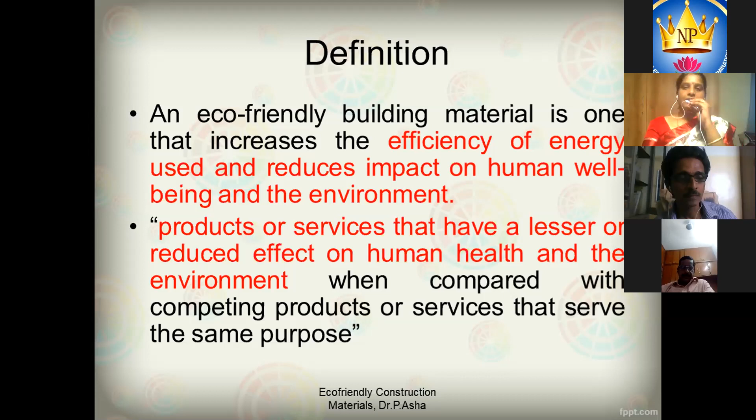Hello? Am I audible to everyone? Hello? Am I audible to everyone? Yeah, ma'am, audible. Just continue, ma'am. Okay. If I'm not audible, please message me so that I will stop and I will continue.

So as we all know, bamboo is a very commonly available material, not in the urban areas, but in the rural areas, and it is a type of grass. Bamboo is actually a member of the grass family, and it is one of the fastest growing plants on the planet, supposed to grow up to 3 feet per day. You may ask why not the other trees. The reason is, for construction purposes, bamboo can be harvested every 3 years. In contrast, trees take about 25 to 50 years to grow. That is the reason why bamboo is said to be an eco-friendly material.

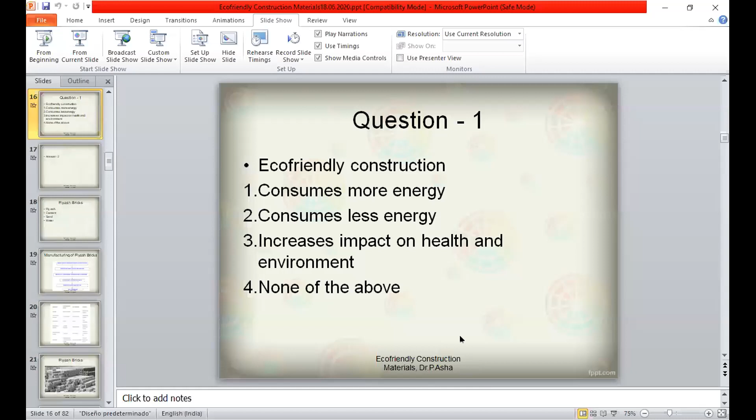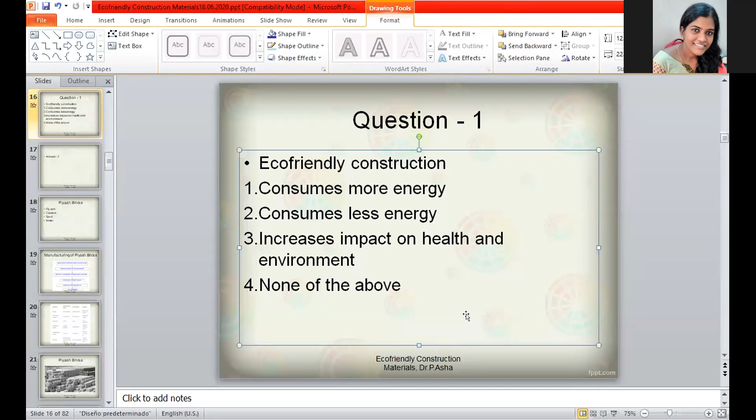Ma'am, click that share screen button instead of that. Yeah, I did that. It's visible, ma'am. Now it's visible. Thank you, ma'am. Visible? Yeah. It's not visible. You can WhatsApp me on my number also so that I'll become alert. I don't know whether it is visible to you or not. Okay, ma'am. Now it's visible. Yeah, ma'am, now it's visible. Okay. Thank you, ma'am. Students are online.

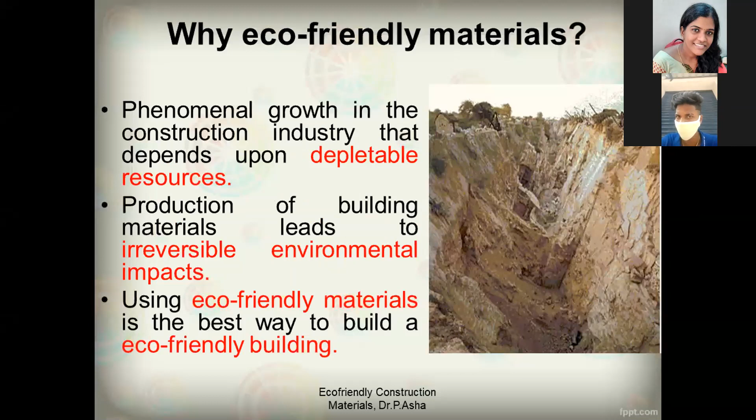Are they answering the question? I'll pose the question again. So eco-friendly construction, it means, I'm giving 4 options: whether it is consuming less energy, or it is using more energy, or increasing the impact on health and environment, or none of the above.

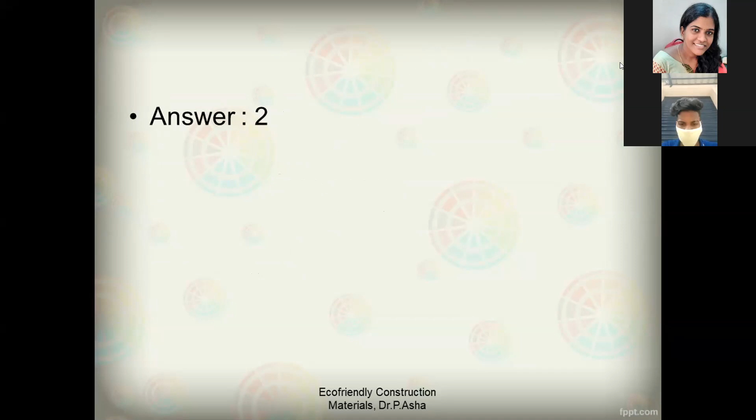Subhadra ma'am, are the students answering the quiz? Eco-friendly construction materials. Eco-friendly construction: whether it is consuming more energy, less energy, or increasing impact on health and environment, or none of the above. So what does eco-friendly construction mean? I just want the participants to answer this. Yes. Bharani Rajavel has answered the one which consumes less energy.

So the screen is not visible to you. I'm not aware of it. Sorry. Now it is being corrected, I think.

Yeah, it's consuming less energy. Yes. So I thank the participants who are responding in the chat window. I'll continue with this now. So eco-friendly construction is the one which is consuming less energy. Now I'll proceed to other eco-friendly construction materials.

The next one is the fly ash bricks. As we all know, fly ash has been used for a long time in the construction industry, which is a byproduct obtained from the thermal power station. Earlier it was used only in concrete for construction, but nowadays it is being used for bricks also. So the fly ash bricks are manufactured

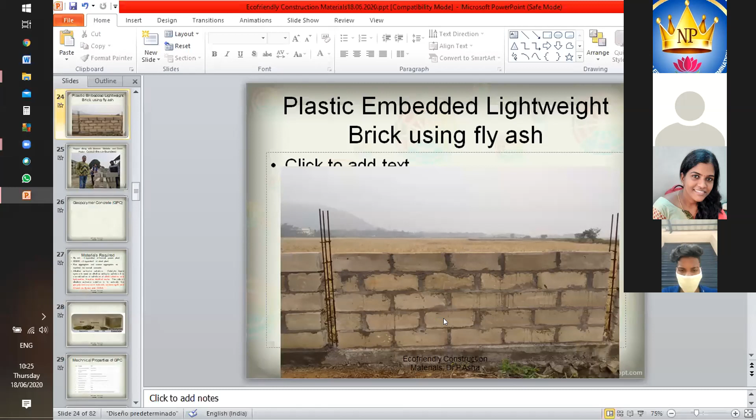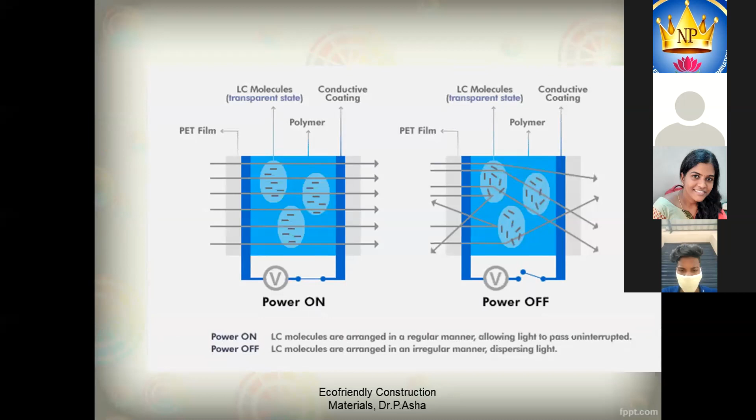Sorry, ma'am. Excuse me, ma'am. Your screen is not visible again, ma'am. Now it's visible, ma'am. Thank you. I don't know why it's going again. Visible? Yeah, ma'am, it's visible. So the fly ash bricks again. It is being recorded, no? The program is being recorded? Yeah, ma'am, it's being recorded. Okay, thank you.

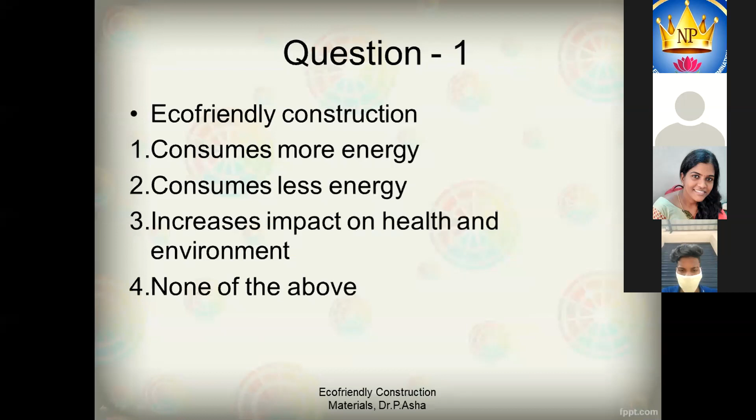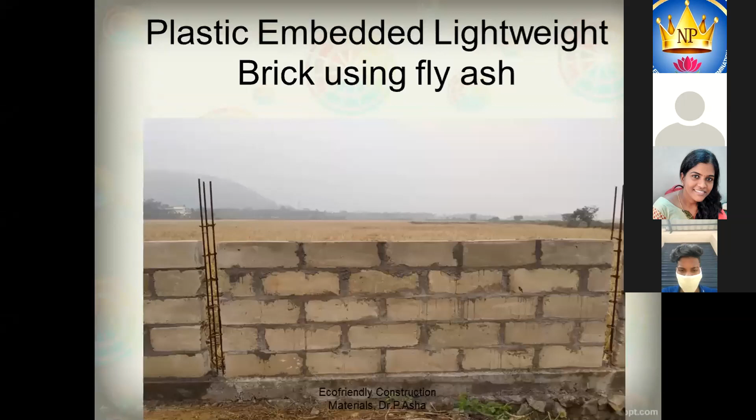So fly ash itself is a waste material. In addition to these fly ash bricks, if you add plastic in it, which is another waste material, it becomes double eco-friendly, and it is also lighter than the conventional fly ash bricks and also the conventional clay bricks. This is the wall being constructed with the plastic embedded lightweight bricks. If you are using plastic, one disadvantage is that the strength may get reduced, and we have to take care of it.

This is the photograph of the students who have the startup of fly ash bricks with plastic waste. So like this, I want the current students to have some interest in these materials and find something innovative like these people. Just to motivate you, I showed that.

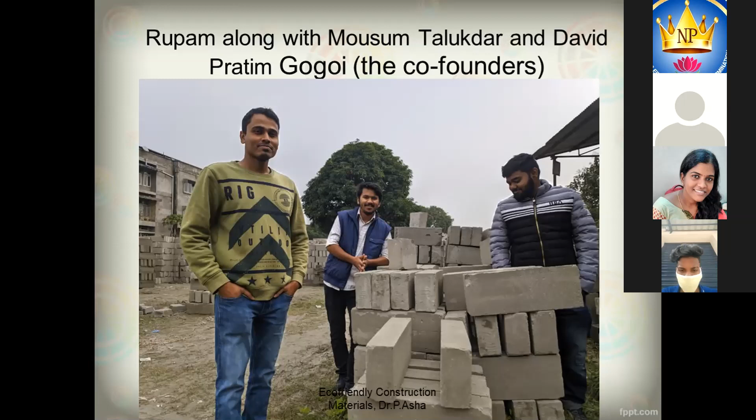Geopolymer concrete is another new material which is being introduced in the market. It has only fly ash and GGBS as the cementitious material. You do not have any OPC. If you are completely omitting OPC, it means that you are saving a lot of carbon dioxide emission into the atmosphere and also less energy consumption. Along with fly ash and GGBS, fine aggregates and coarse aggregates are used. Another important ingredient of geopolymer concrete is the alkaline activator solution.

So why do we require this alkaline activator solution? It acts like a catalyst which increases the pozzolanic activity of the fly ash and GGBS. If we simply add fly ash and GGBS, the chemical reaction producing the binding capacity is very low. In order to activate that, we have the alkaline activator solution, and they use alkali silicates and hydroxides, that is, sodium hydroxide and sodium silicate. Much research is going on in this area.

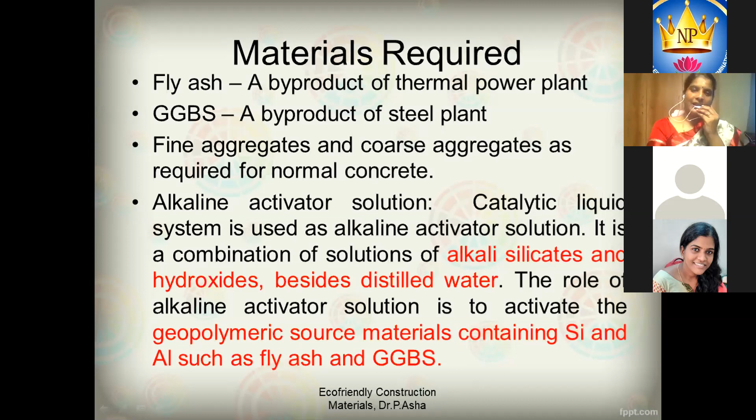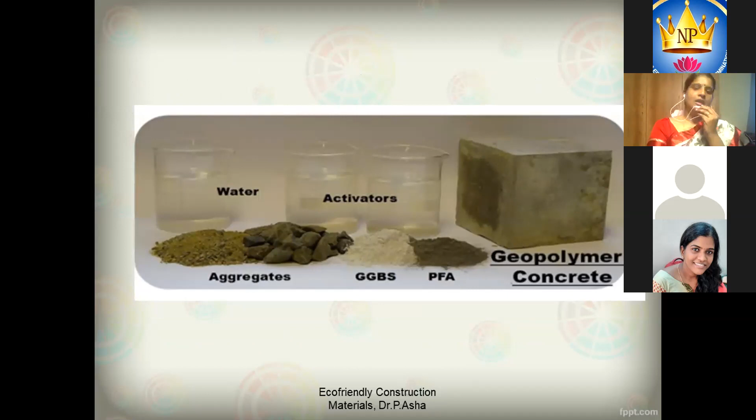I don't want to get into the detail of that, but geopolymer is the one which completely avoids the use of cement. It comes under the category of eco-friendly materials. The main ingredients used so far are fly ash and GGBS. We can try other new materials. This photograph shows the ingredients of geopolymer concrete, that is aggregates, water, activators, GGBS, PFA, that is pulverized fly ash. These are the main ingredients in geopolymer concrete.

What are the mechanical properties? Any material which you claim as eco-friendly, or which you are researching, should definitely have better properties than conventional concrete. We cannot simply add plastic, we cannot simply avoid the OPC, but we have to prove that this material is superior to the conventional existing materials.

The compressive strength of GPC, that is geopolymer concrete, goes up to 35 MPa in 24 hours. The 28-day compressive strength goes up to 70 MPa. And the rate of gain also seems to be faster than normal concrete. And the modulus of elasticity: we test the stress-strain behavior of the concrete, find the slope, and get the E value. The E value plays a major role in resisting deflections, but it is comparatively lower than normal concrete. Porosity, another durability property, is found to be low in GPC.

The chloride penetration is also very, very low. The chloride penetration, if it is low, it is advantageous. It is not allowing the chlorides inside it. The next one is the drying shrinkage, low, heat of hydration low, fire resistance high, acid resistance high, and it behaves similar to the cement concrete beams. So these are the properties of the geopolymer concrete.

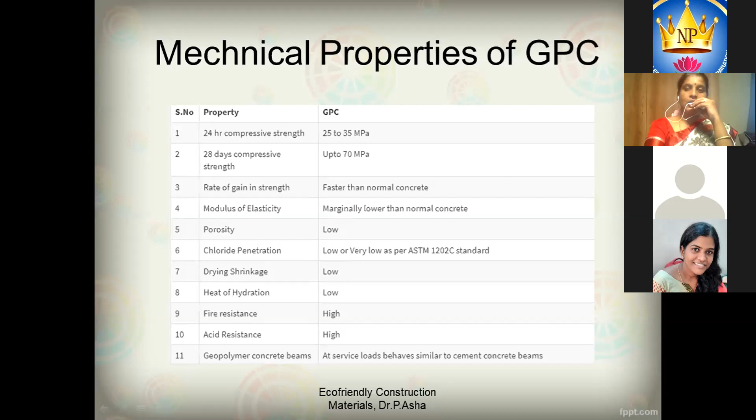So the next one, I want to tell about some alternate materials for the aggregates. Since we are using the stones, that is the blue metals or the coarse aggregates, there are different names for the coarse aggregates, that is basically taken from the granite mountains. So nowadays, if you see, everywhere it is being exploited, and the mountain and the granite quantity also is getting used vastly. So everywhere we have a shortage of natural resources. So we should explore what are the alternate aggregates.

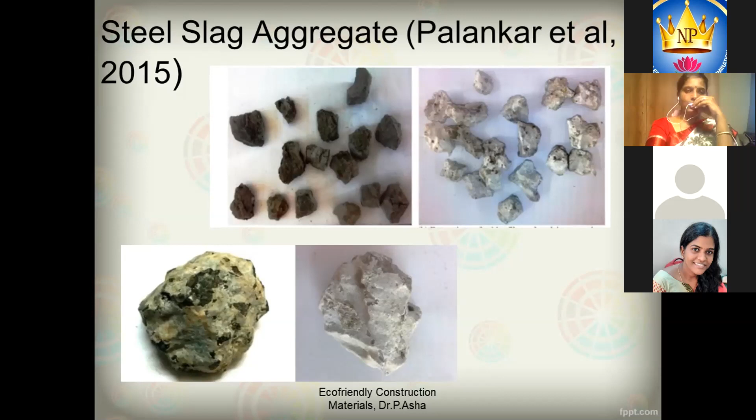So Palankar, these are all the research works done already. I have given the references also on the site for you to refer. In 2015, they conducted research on steel slag aggregates. So steel slag is being used as the coarse aggregates. If you are doing this, you are conserving the natural aggregates. That is the main aim for eco-friendliness.

So another important advantage is, the steel slag, when it is being used in the dump yards, has high cost involved in it, and also the negative impact is more. This steel slag is produced from either the oxygen furnace or electric arc furnace. Either method it is produced, and it is generally dumped. But this is not an effective way of disposal of this waste material. So instead, if we use it as coarse aggregate, we are not only preventing the environmental impact it is creating on the land, but also we are having some benefits.

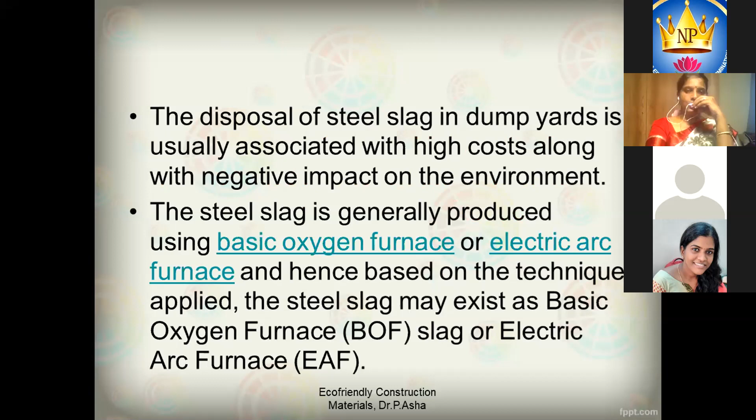So what is the steel slag which is being used? So that is a comparison. Any material which is being put into the concrete, we have to check whether it has superior behavior than the conventional thing. So if you are using the steel slag instead of the coarse aggregate, you have to check it against coarse aggregate. That is what is done here. So the specific gravity of the conventional aggregate is 2.69, whereas this is 3.35. And the bulk density is 1700, whereas the conventional one is 1500.

The crushing value, for aggregate you have to test the crushing value, is comparatively lesser than the conventional aggregate. And the Los Angeles abrasion value, if you are using it in pavements or in an industry field, we have to check for this product. All these values are low. So accordingly, we have to decide where we have to use this aggregate. Any waste material, we cannot 100% say that it is super beneficial, but of course it can be used in appropriate situations so that we can reduce the waste dumped onto the land.

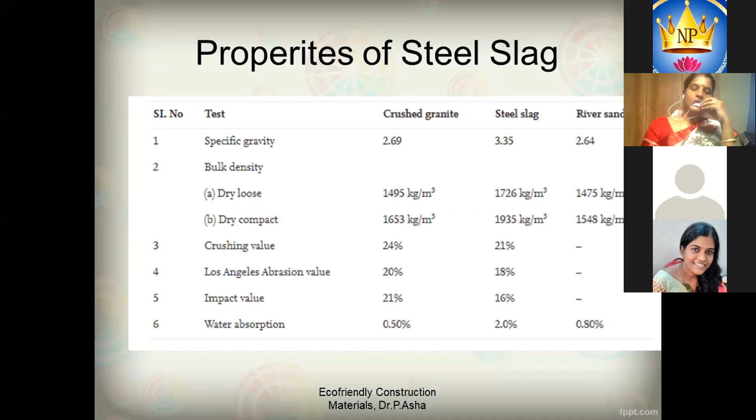So if you take the compressive strength at 28 days, they have tested the steel slag with the geopolymer. It is found that 56.1 Newton per mm square is obtained. The conventional is 55.9. So it is almost on par with the conventional. If you take the slump value also, it is 55, whereas the conventional concrete also has 35. So like this, we have to compare various properties which we obtain with these alternate materials.

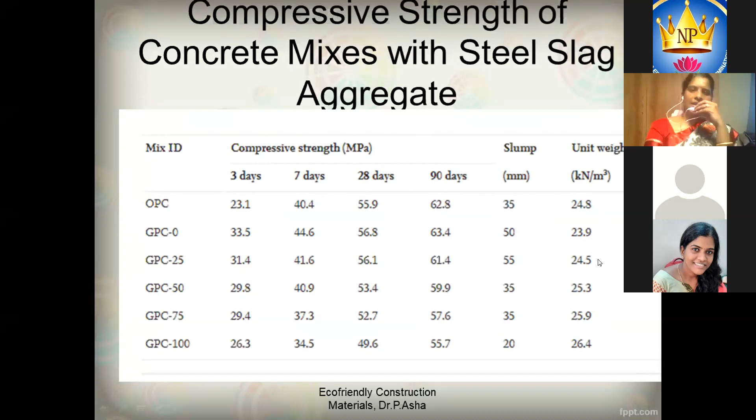If you take the unit weight, it is nothing but the density of concrete. So 24.8 is the conventional concrete unit weight, whereas if you take geopolymer concrete with steel slag, the unit weight keeps on increasing. So what would be the reason? The density of the aggregate is higher. That is mainly causing the increase in the unit weight. So like this, we have to analyze the effect. Similarly, if you take the flexural strength, split tensile strength, all these parameters, the steel slag aggregates have properties of the conventional concrete with 25% replacement.

Tensile strength increases at the 25 and 50, whereas flexural strength increases only at 25. Thereafter, it is getting decreased. So you should find out what is the optimum percentage of use of steel slag aggregates, and then you have to proceed. Modulus of elasticity, if you take, it is getting decreased. So it is not as stiff as the concrete. So like this, we have to classify.

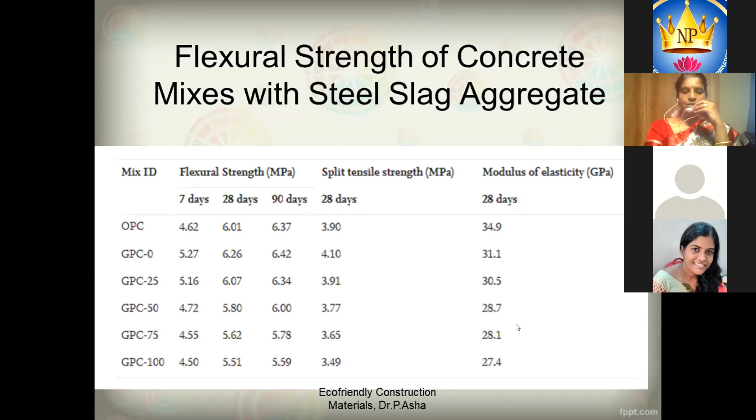So now it's time for the second question. I want participants to answer this in the chat window. What does GPC stand for? Ground plain concrete, geo plain concrete, geopolymer concrete, or none of the above? Kindly share your answers. Yes, so I can see some students who are typing the answers. Yes, option 3, geopolymer concrete.

So for Ramya, I'm not audible. I think I'm audible to most of them. If I'm not audible, the coordinator will inform me.

Yes, GPC stands for geopolymer concrete. So hereafter, if you see GPC anywhere, you will remember me. So at least I have created some awareness and enlightened you in some areas of eco-friendly concrete. So now continuing to the presentation, the answer is 3.

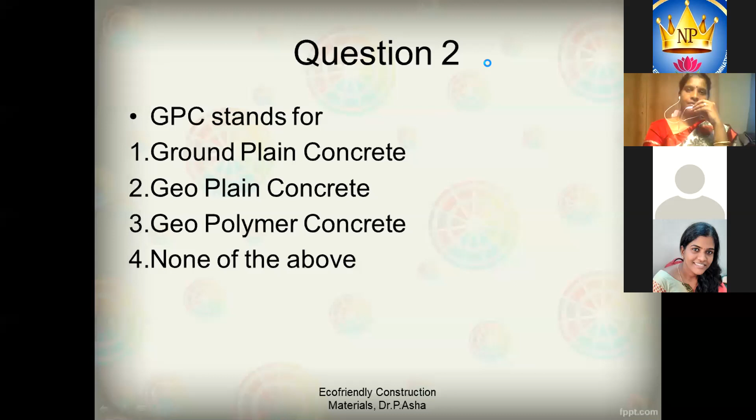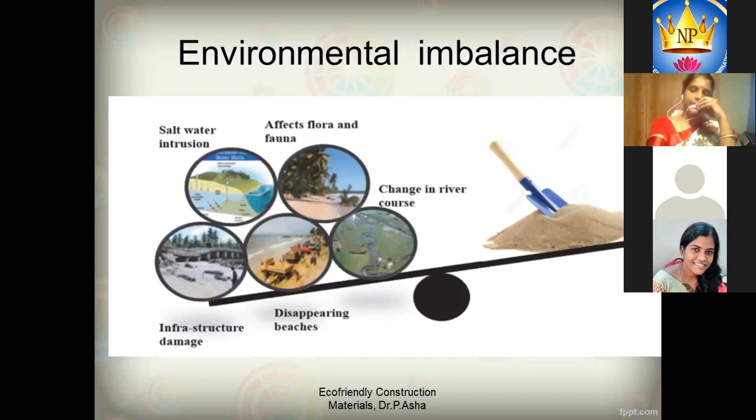And also disappearing beaches. Even the beach sand is now being excavated because we want sand, and the river sand is getting completely decreased. The quantity available is completely decreased. So what should we do as civil engineers? Why can't we think of alternate materials? So that is the next one, the M-sand. All of you, I think, would have known this term M-sand.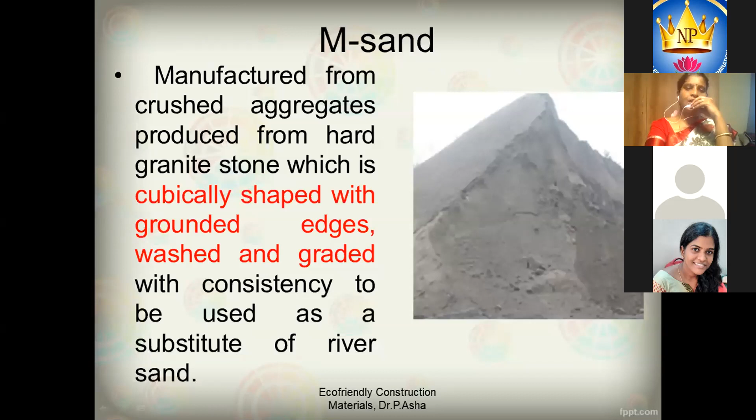So M-sand is produced from hard granite stone, which is cubically shaped with ground edges, washed and graded with consistency to be used as a substitute for river sand. So this is the manufacturing of sand. First we do drilling, then blasting of the rocks, and extraction. It is subjected to primary crushing, screening, and then secondary crushing, and finally it is washed, the sludge is removed, it is converted into M-sand and transported.

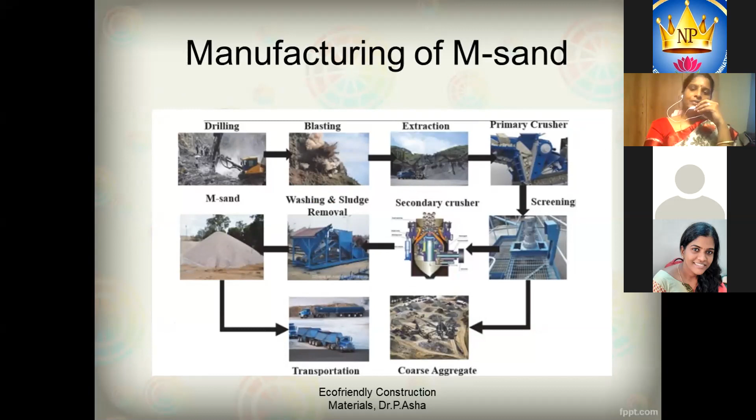So M-sand is not just the waste material obtained from the crushing of granite. It is subjected to different processes, as you can see in the flow chart, so it is tuned to act as a fine aggregate in the concrete. M-sand has a higher fineness modulus, so it has very comparable workability in concrete compared to natural river sand. M-sand is also free from silt and clay particles, offers better abrasion resistance, and has higher unit weight and lower permeability. So it is less disruptive to the environment because we are already using the waste material available.

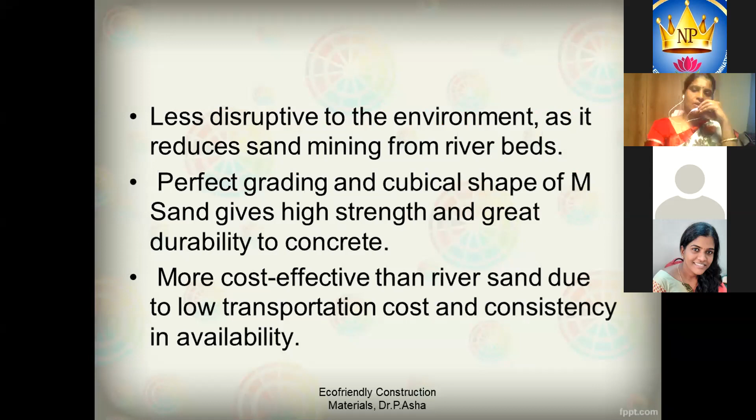So it is less harm to the environment, and we are not using extra energy in producing it. Perfect grading and cubical shape of the M-sand will give higher strength. Any sand particle should have a particular grading, meaning certain size ranges, and only then can it be used in concrete. And also the shape: it should have a cubical shape for better workability and durability. It is more cost effective than river sand due to low transportation cost and availability, because it's a waste material.

So when we come to the features of eco-friendly buildings, if you say a building is an eco-friendly building, what are the features it should have? It should have a solar panel. All of you would be aware of the solar panel.

It converts the heat energy from the sun into electrical energy, for heating water or providing electricity in the house, like that. Next one is if you use Energy Star appliances. Nowadays we go for 5-star rating, 3-star rating. That is nothing but the Energy Star appliances. It uses less energy, and it decreases the current bill also. So those types of apparatus or instruments you have to use.

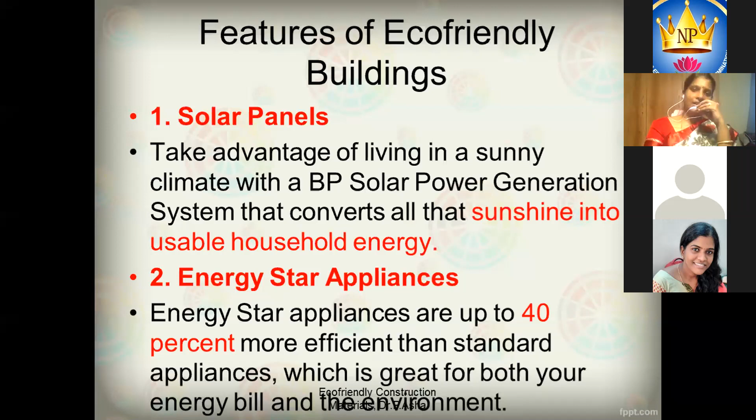And water conserving methods. So what are the water conserving methods? Either you have rainwater harvesting, or you have to use low flow shower heads, faucets and toilets. In other foreign countries nowadays, you can see in Facebook and WhatsApp, many videos are coming. Just an example from my observation, they are using the wash basin water for flushing in the toilet. This is a very simple example. So we have to think in that way, how the grey water can be used for recycling in our own house.

So the wastewater can be used for watering your garden, washing the car, or even toilet, saving gallons of water. And you can use water using instruments which use less amount of water. Like that, you can think and use the apparatus or instruments or devices.

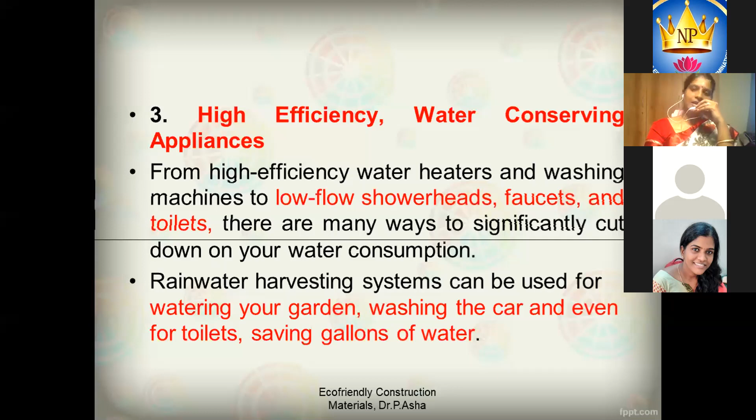The next one is the low emittance windows. I told you already about thermochromic glass. Like that, you can use energy efficient air conditioning. When you are using energy efficiency ratio, you have to be very keen on that. That is, if you divide the output by its input, it should be high. You should have less input current, but the output should be high. You should use such devices in this construction or after construction, so that you can cool your home effectively while saving money on your electric bill.

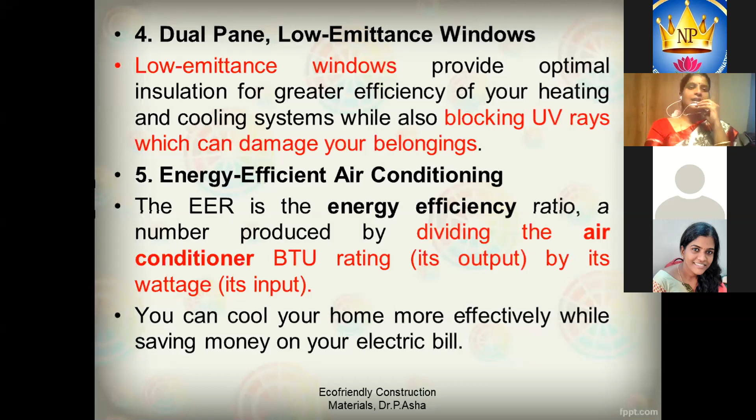And another one, smart thermostats. Nowadays, it is available in the conventional AC itself. So it goes up to a certain temperature and automatically cuts off. So it turns off the unnecessary heat while you are at work and back on when you are at home. Similarly, smart lighting. When you are not available, it should get switched off automatically. Like this, latest technologies, smart technologies you have to use.

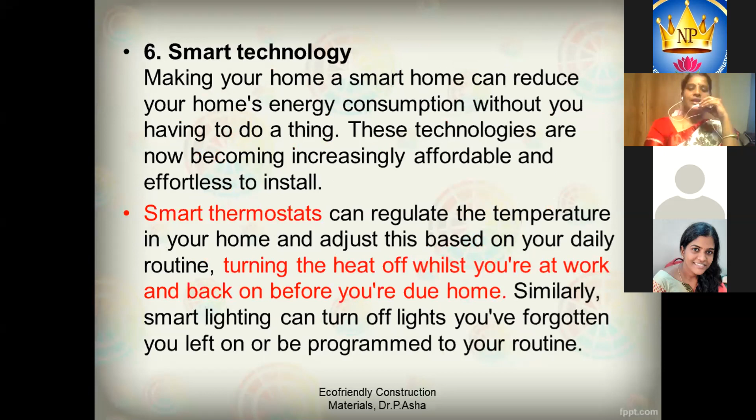And also the insulation. Insulation is a main thing. It is being done in the Western countries. So far, we are not using any insulated walls. But it is better to go for insulated walls in order to avoid the transmission of unwanted heat inside the buildings. Some of the materials we can use for insulation are cotton, cork, and recycled plastics, etc. Insulation is nothing but it acts as a barrier. And there is also now a wide variety of natural eco-friendly alternatives to traditional insulation materials, which often contain high amounts of problematic chemicals and additives.

When using insulation also, you should be very careful that we are not using any materials which are harmful to human health. Nowadays, we can see advertisements on TV like paints which are shielding your house. It acts like a lamination. So all these materials are used as an insulation only. It's a paint example. Like that, we can explore in the walls also, which act as an insulating material. So next one,

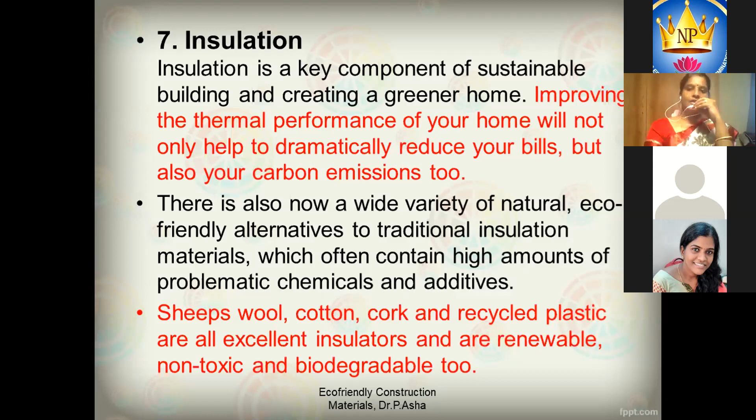in a new building, you should take care that you are using the maximum lighting and ventilation which is available outside your home, so that you don't need to switch on the lights and fans during the daytime itself, but it is very common that our houses are jam-packed in such a way that we cannot. So we as civil engineers have to plan effectively, allowing the natural light and ventilation like we did in the olden days.

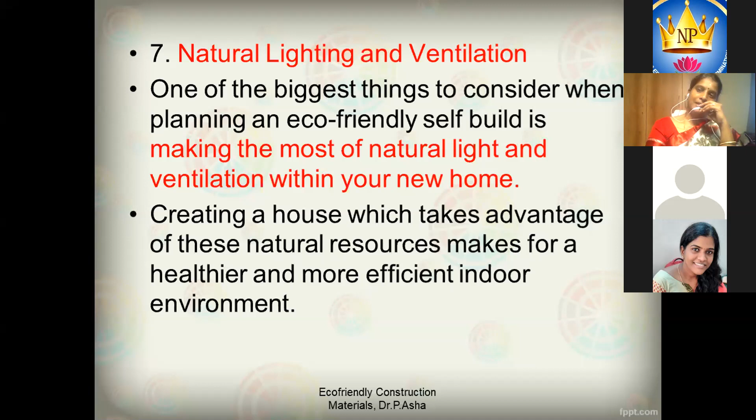Actually speaking, the olden methods are very golden methods, because they made use of the light and air available in the outside atmosphere to make the inside of the home very bright. They did not use any tube lights. They did not use any fan during the daytime. But now you see in every house, even during the daytime, the AC is running. So we are in that situation now. So we have to plan our houses in such a way that we get the maximum lighting and ventilation. And another one is the reclaimed wood.

So the wood reclaimed from the old buildings and furniture is more mature. It is more often very useful. It is stronger, durable, and less prone to warping. So we can think about this. Construction doesn't mean only cement, sand, and aggregates, but also the wood, also glass, everything comes under construction material. So we should also think about this.

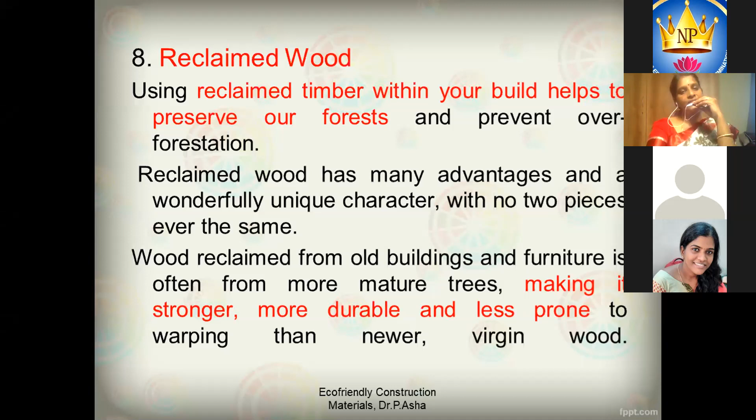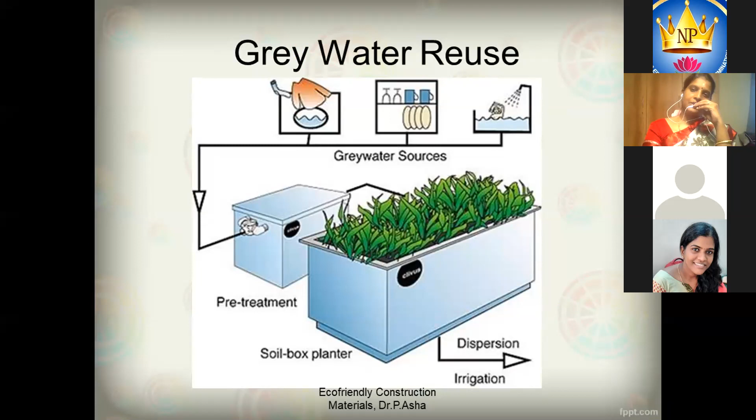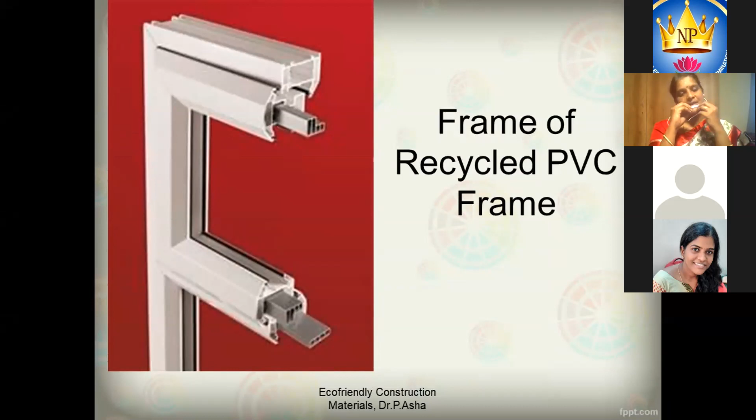So now I come to the third question. So mention any two features of eco-friendly buildings which we discussed now. Any two features.

So I come to the next one, that is the eco-friendly cement. So eco-friendly cement, if you take the first one, we can say Portland Pozzolana cement. Portland Pozzolana cement is already known to you all. It is nothing but replacing the conventional cement with fly ash or GGBS like that. So those types of cements are available now in the markets. So it is an eco-friendly material.

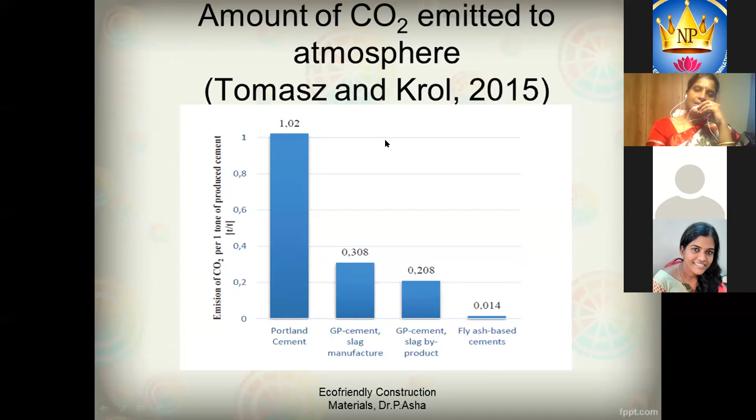It is because it is replacing the clinker with gypsum and other material blended in. So it's an example of eco-friendly material. And Portland cement is emitting so much carbon dioxide into the atmosphere, whereas the slag cement, that is the GGBS cement, and fly ash cement emit only about 10% of the carbon dioxide into the atmosphere. And this is the cement production. Cement production is increasing day by day, and we are in second place next to China.

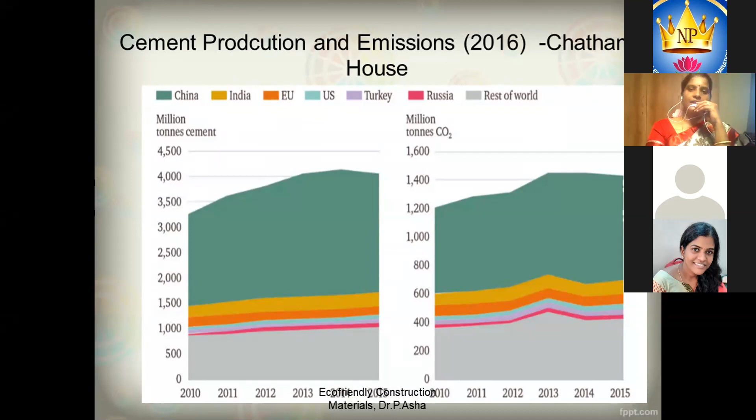So now we are following them in the Corona also. We are now following in the cement production also. We are following them in the second place. So we have to think of an alternative definitely. You can use low carbon cement. That means the carbon emission is being reduced. So nowadays, much research has been going on in this area. They are trying for magnesium-based cements, calcium silicate cements with reduced clinker content, geopolymers, I already told you.

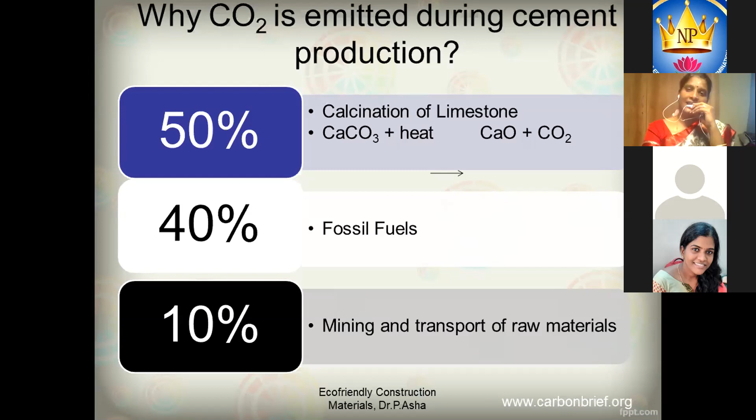So next one is low carbonate clinkers and cements with reduced clinker content. Clinker is the main culprit which is emitting more amount of carbon dioxide. So many people have tried in this area where we can have less emission of carbon dioxide. So why is carbon dioxide produced in the cement production? Because we are calcinating the limestone. We are heating the limestone so that it will be converted into calcium oxide and carbon dioxide. And the remaining 40% is caused by the fossil fuels, and 10% is in the transportation of the materials. So due to this, the carbon dioxide emission is very, very high in the cement production. So we have to take care how to reduce this.

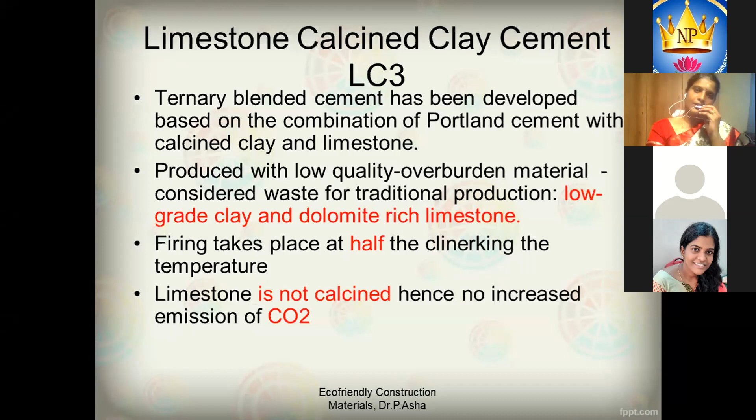And next one is the limestone calcined clay cement. It is a hot topic, and it is being researched by many people. So this is nothing but you are using low grade clay and dolomite rich limestone. The firing will take place at only half the temperature. So you need not go to about 1450 degrees centigrade. Generally in the cement production, you are heating the limestone to a very high temperature, which emits the carbon dioxide gas. Whereas in this type of cement, the temperature is only half, that is around 700 to 800 degrees centigrade. So the emission of the carbon dioxide will also come drastically down. So this is the carbon dioxide emission. If you take the OPC and then you take the LC3, it's around half of the carbon dioxide which is being emitted.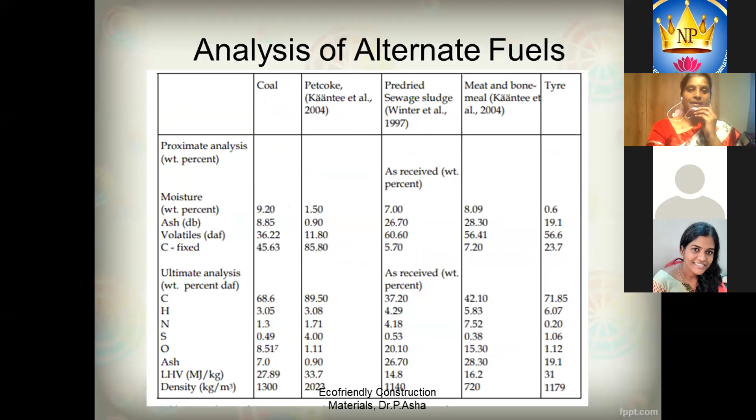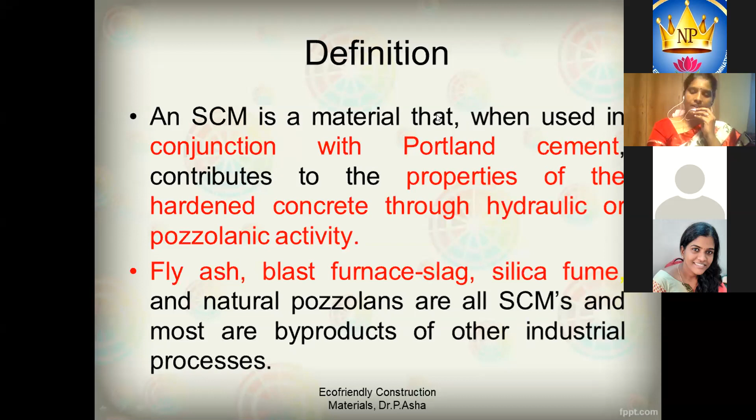And next one, you can use the recycled materials. So instead of going for the pulverized fly ash or the GGBS or silica fume, you can even use materials which have already been used and destroyed or thrown out. If you take recycled material, the best example is the recycled concrete. So everywhere now, particularly in Chennai, the buildings are being demolished for no reason. Even some buildings in good condition, where minor repair may be required, people destroy. They want to build a very modern, very big construction, or they want to convert a residential building into an apartment. It is happening nowadays everywhere. So think about the waste materials being created. You can use the demolished concrete as the recycled aggregates in the concrete.

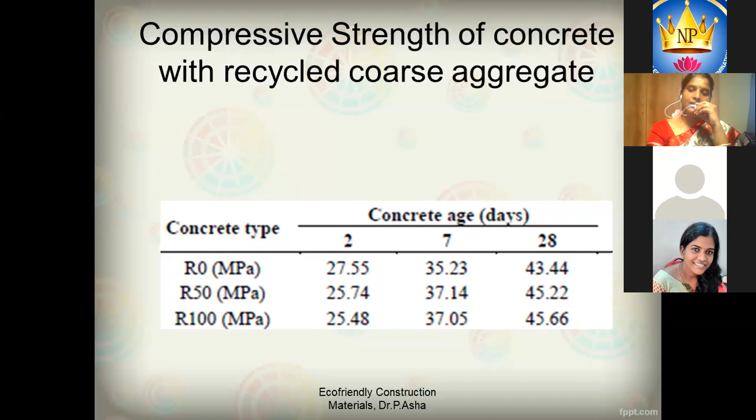So research has already been done in this area. And they have found that the strength of the recycled aggregate concrete is comparable or sometimes even higher than the conventional concrete. Conventional concrete is 43.44 MPa, whereas the recycled aggregate concrete has 45.22. Even if you completely replace the coarse aggregates with recycled aggregates, the strength is about 45 MPa. Similarly, the wear resistance is also comparatively better than that of the conventional concrete.

And another thing is self-curing concrete. So why should I talk about self-curing concrete in eco-friendly construction? It is because we save the amount of water when we use self-curing concrete. The internal curing itself will help the concrete to get cured, and we need not use additional external water. And in places like Chennai, we have many

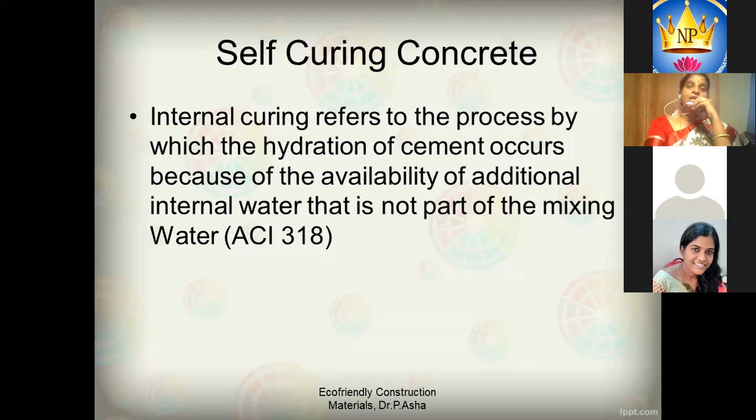Otherwise it cannot be included in the concrete, as it may have some detrimental effects. So you have to carefully analyze the physical and chemical properties of the materials being used. Only then should you try exploring them in concrete. Nowadays people simply try to use them in concrete. Don't do that. As far as possible, please study the physical and chemical properties and whether it is compatible, whether it is suitable for use in concrete construction; only then can you use it for concrete.